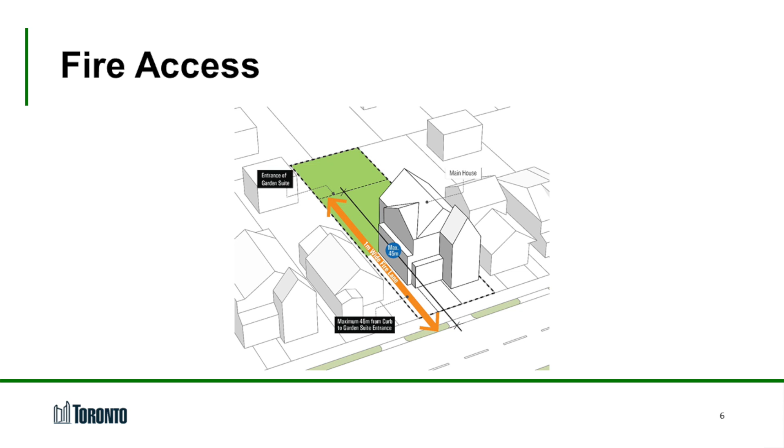Fire access: in this image, you see the main house with an area for a garden suite in the rear yard. The orange arrow demonstrates the path for emergency services to the entrance of the garden suite. The draft permissions would require a maximum 45-meter travel distance with a minimum width of 1 meter and a vertical clearance of 2.1 meters from a public street to the entrance of a garden suite. This will ensure rapid access to the suite in the case of an emergency.

In this slide, we will talk setbacks, which refers to the distance from a building wall to a lot line.

A side yard setback refers to the distance between the nearest building wall and a side lot line. In this image, we return to the main house, with area for a garden suite at the back.

In most cases, the minimum side yard setback for a garden suite is 10% of the lot width. For example, on the 10-meter wide lot shown here, each side yard setback for the garden suite shown in yellow is equal to 10% of the lot width, or in this case, a minimum of 1 meter.

On small lots that are less than 6 meters wide, the side yard setback is a minimum of 0.6 meters. On large lots that are greater than 30 meters, the side yard setback is a minimum of 3 meters.

On most lots, the rear yard setback, shown in blue here, is a minimum of 1.5 meters. On deep lots greater than 45 meters, the rear yard setback is a minimum of 50% of the garden suite building height. For example, on a deep lot, a 4-meter tall garden suite would need to be set back a minimum of 2 meters from the rear lot line.

Windows would only be permitted for a garden suite with a side yard setback of 1.5 meters or greater. These rear yard setbacks and side yard setbacks are intended to address privacy issues and to provide adequate space for soft landscaping, maintenance and repairs, drainage, and grading.

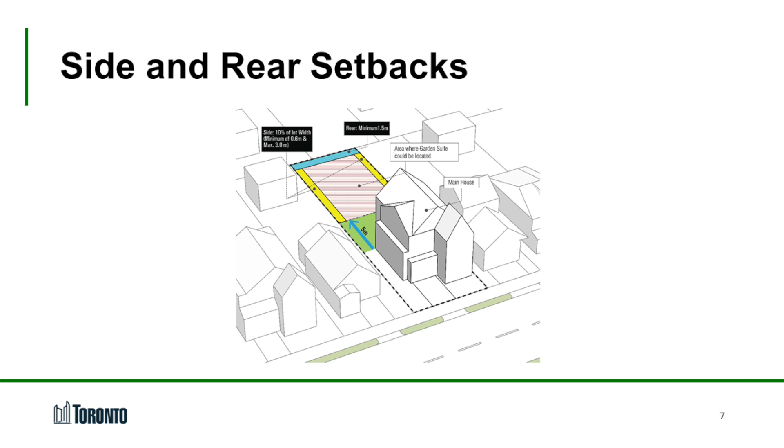This slide shares the permissions and standards around separation distances, which refers to the distance between the garden suite and main house. The draft permissions would require a minimum separation distance of 5 meters for garden suites with a height of 4 meters or less, and a minimum separation distance of 7.5 meters for garden suites with a height greater than 4 meters up to a maximum height of 6 meters.

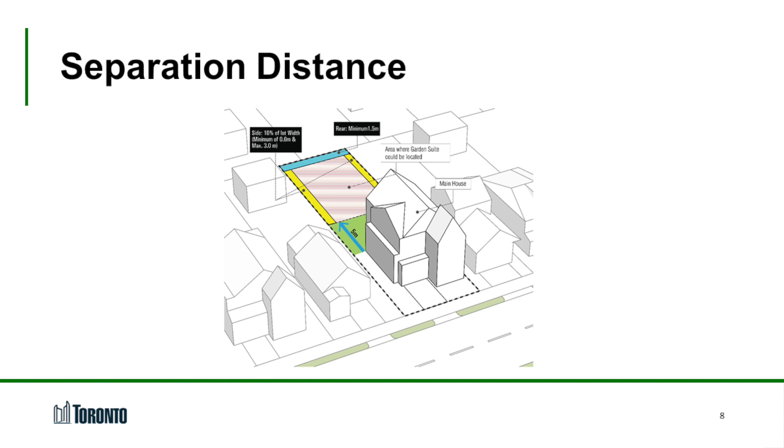The minimum 5-meter separation distance is shown here by the blue arrow.

The maximum building footprint is the maximum area that a garden suite can cover on a lot. The draft permissions limit the footprint of a garden suite. The light dotted lines on the ground in the backyard illustrate the required setbacks shown in the previous slides.

The maximum footprint is the smaller of the following rules: a maximum coverage of 20% of the whole lot, as shown in this image, where the boundary is shown in the black dashed line; or a maximum coverage of 40% of the rear yard only, shown in this image, where the rear yard is bounded by the purple line; or a maximum of 60 square meters.

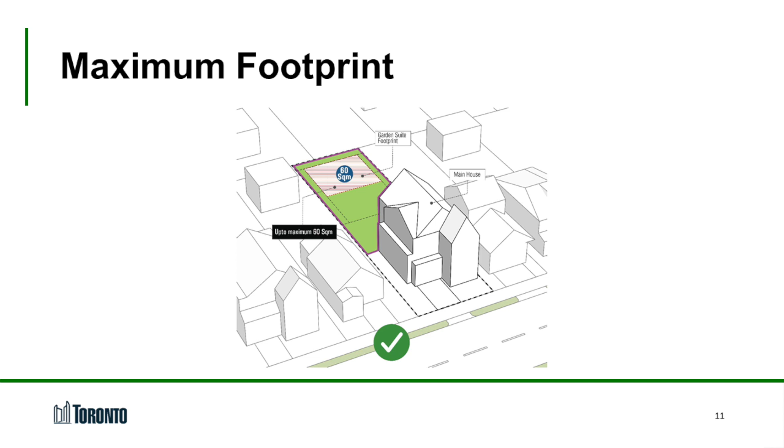In this example, the rules for maximum footprint will result in a garden suite with a maximum size of 60 square meters, while maintaining the separation distances and setbacks as shown in the lightly dotted lines.

Height refers to how tall a garden suite can be above the ground level in the backyard. The draft permissions would permit a maximum height of 4 meters when the garden suite is at least 5 meters from the main house. A maximum height of 6 meters would be permitted when the garden suite is at least 7.5 meters from the main house, and angular planes are applied to the front, side, and rear of the garden suite.

This image shows the main house with a 4-meter tall garden suite in the rear yard. For perspective, the image also shows the neighbors' rear yards, and the current zoning permissions for ancillary buildings such as garages or garden sheds.

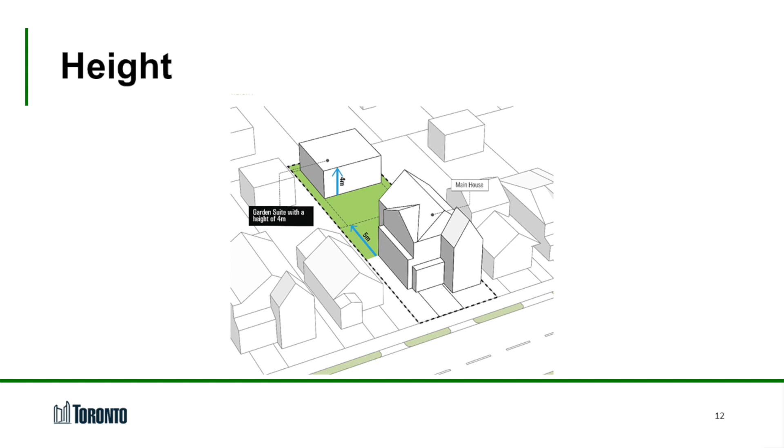For garden suites that are taller than 4 meters, the additional height up to 6 meters is regulated by angular planes. Angular planes are a design tool that can help limit the impact of buildings.

As the height of a structure increases, the building facade steps back from the property line, reducing privacy and shadow impacts on adjacent properties. A 45-degree angular plane is a generally accepted standard for gradual building height transition and helps maintain good sunlight access on surrounding properties, particularly during the spring through to the fall, when plants and gardens are most sensitive to shadow impacts.

In this image, you will see the angular planes in red, which shape the additional 2 meters of height that may be permitted on a garden suite above the base height of 4 meters if other standards are met.

The draft permissions would require that the following angular planes apply to the garden suites. In the front, a 45-degree angular plane starting at a height of 4 meters and 7.5 meters from the rear main wall of the main house, indicated by the blue arrows.

At the rear, a 45-degree angular plane starting at a height of 4 meters from the required rear yard setback. And at the side, a 45-degree angular plane starting at a height of 4 meters from the required side yard setback. No angular plane is required where a lot line is adjacent to a street.

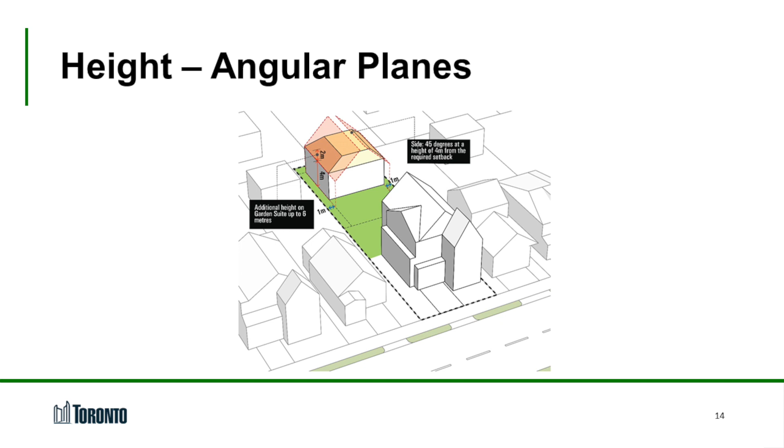Garden suites are intended to play the dual role of providing additional forms of gentle density housing while also respecting the critical importance of green open spaces on the well-being of the natural environment and the city's residents.

Backyards are an important amenity space for the residents of the main dwelling and the garden suite, and present an important opportunity to provide the permeable surfaces needed to retain stormwater on site and to support the city's mature tree canopy. The draft permissions would require that a minimum of 50% of a rear yard area be soft landscaping, like grass, gardens, and so on.

For example, rear yards with areas of 150 square meters would require 75 square meters of soft landscaping. The calculation of the required soft landscaping applies to the entire rear yard area, including the footprint covered by the garden suite. The garden suite counts towards the part of the yard that is not soft landscaping.

In the image shown, the soft landscaping requirement is shown in the separation distance between the main house and the garden suite, and within the side and rear setbacks.

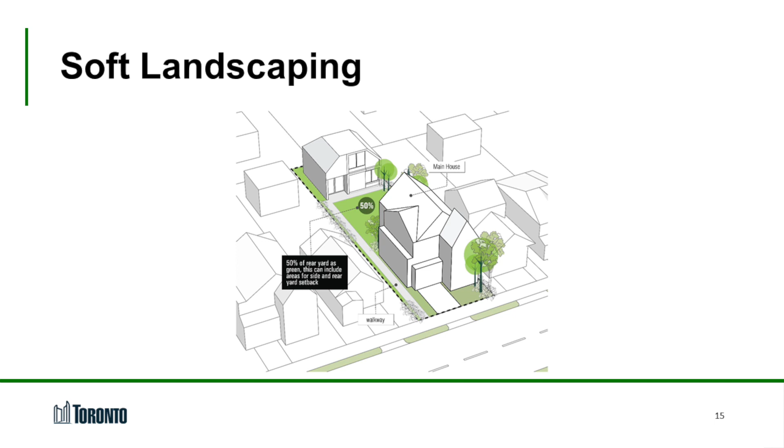Small lots with a frontage of less than 6 meters would follow the same rules, but require a minimum of 25% soft landscaping instead of 50%. This is consistent with what the bylaw currently requires.

According to the Garden Suite survey conducted in the spring of 2021, 44% of respondents thought that tree protection was an important matter to address in potential policies and regulations for garden suites. This has been an important consideration when drafting the permissions for garden suites.

This image shows an existing tree located in the backyard of the main house. The footprint of the garden suite has been adjusted to accommodate the existing mature tree. The 50% soft landscaping requirement ensures that the tree and mature vegetation has space to grow and thrive.

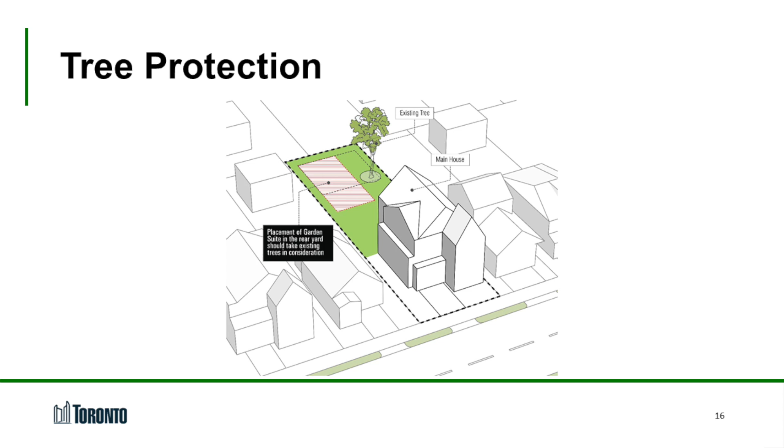This image summarizes all the standards and permissions discussed: the minimum separation distances, the side and rear setbacks, the permitted heights and footprint for the garden suites, and the soft landscape area for the garden.

The next series of graphics will illustrate a garden suite on different types of lots. Each graphic identifies how the same set of rules respond to the lot conditions and result in different sizes and shapes of garden suites.

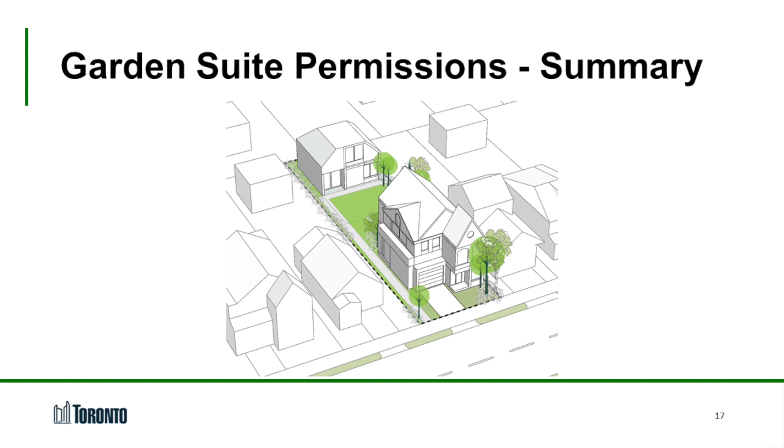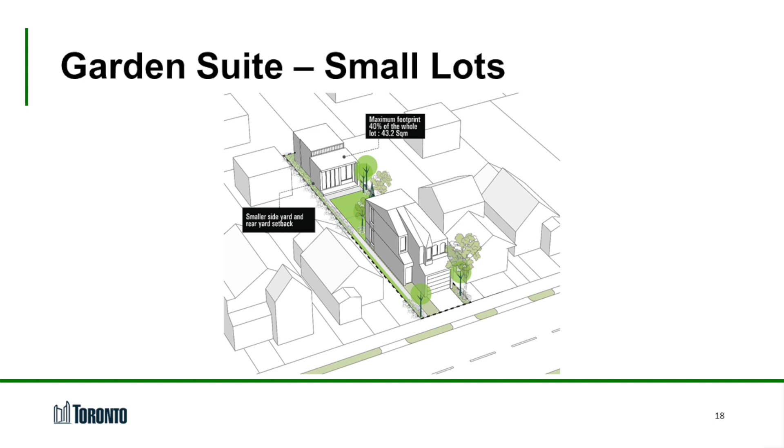The image illustrates a garden suite on a small lot with a width of 6 meters and a depth of 36 meters with a 2-story main house. The lot is bounded by the dashed black line. Notable differences include a smaller garden suite footprint of 43 square meters, a height of up to 4 meters, with a 5-meter separation distance to the main house and narrower side yard setbacks of 0.6 meters between the garden suite and side lot line. Soft landscaping requirements also stay the same at 50% of the backyard area.

This image shows a garden suite on a corner lot with a width of 15 meters and a depth of 36 meters with a two-story main house. Notable differences include no angular plane where the garden suite abuts the street, and the minimum 1.5 meters side yard setbacks to the street, which allows additional space for trees and soft landscaping.

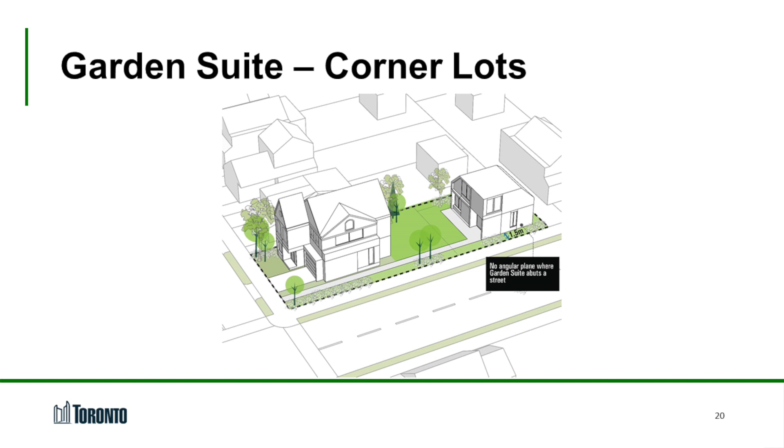This image shows a garden suite on a lot with a width of 14 meters and a depth of 44 meters with a two-story main house. Notable differences include a rear yard setback to the street of at least 6 meters if parking is provided, or 1.5 to 3 meters where no parking is provided, and no angular plane where the garden suite abuts the street. The minimum separation distance between the main house and the garden suite is more than the minimum required of 7.5 meters, which is used to meet and exceed the minimum 50% rear yard soft landscaping requirement, as shown in the image.

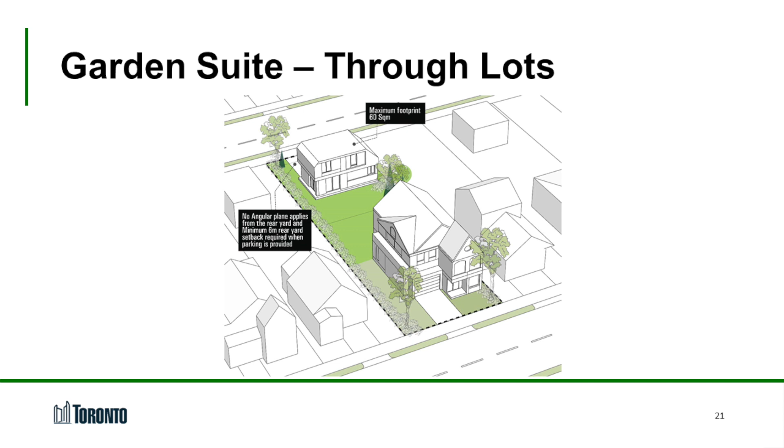The purpose of the Garden Suites project is to provide more housing options, but it is not expected that every lot will be able to accommodate a garden suite. Also, it is not expected that a garden suite will be built on every lot where they are permitted.